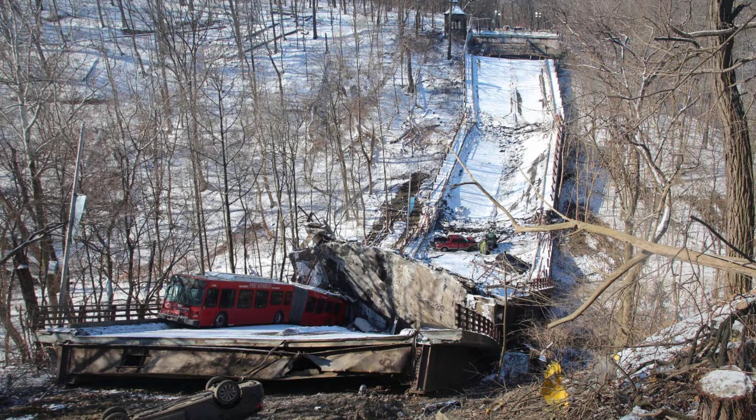January 28th, 2022. You were on your morning commute in Pittsburgh. The Fern Hollow Bridge gave out. 6 vehicles fell 100 feet into Frick Park. No one died. 9 people were injured.

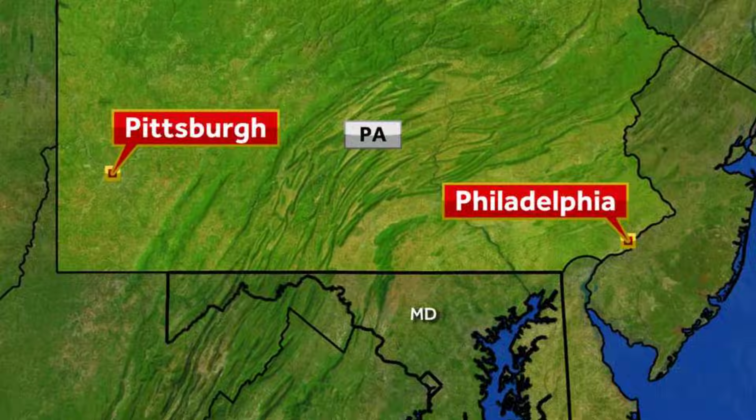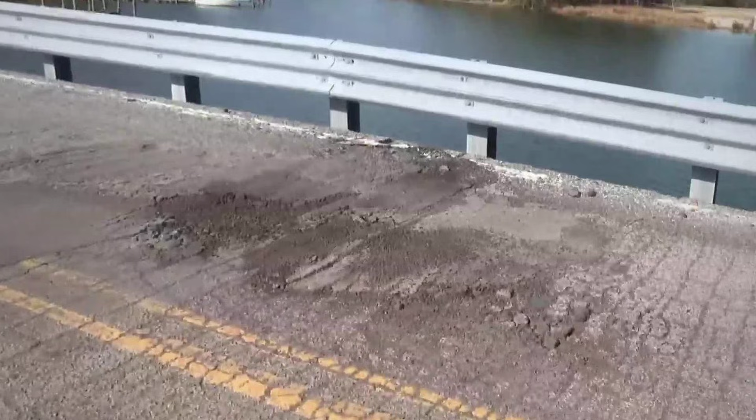It made the news everywhere. But you know what hits close to home? Over 2,800 bridges in Pennsylvania are in poor condition. That's more than any other state in America. 10 million trips cross those bridges each day. Why does this keep happening in our state?

The answer isn't just old concrete, it's something deeper. Every driver in Pennsylvania has already noticed it. Maybe you never put it together until now.

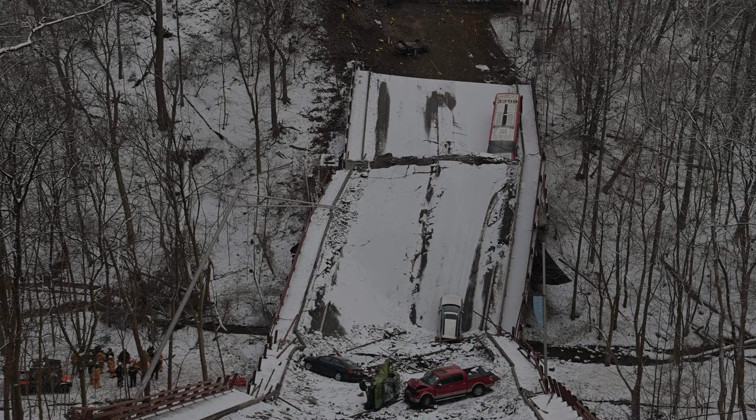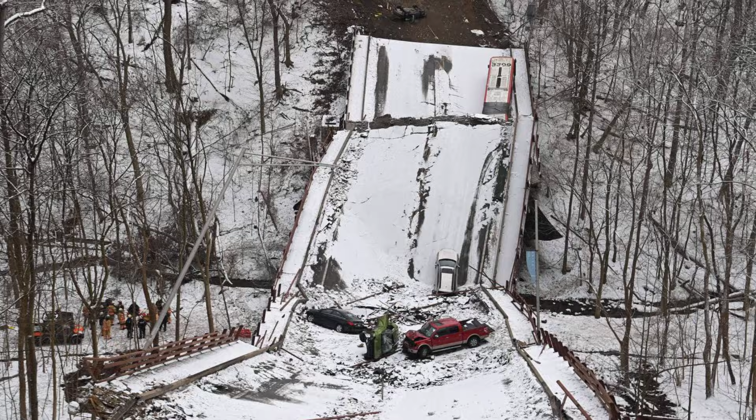Fern Hollow Bridge collapsed at 6:37 on January 28th, 2022. Commuters heading east on Forbes Avenue felt the road fall out from under them. A 447-foot bridge dropped 100 feet into Frick Park Ravine. 6 vehicles, including a city bus, crashed down with the bridge. 9 people were hurt in the chaos. Miraculously, no one died. The bridge was about 50 years old.

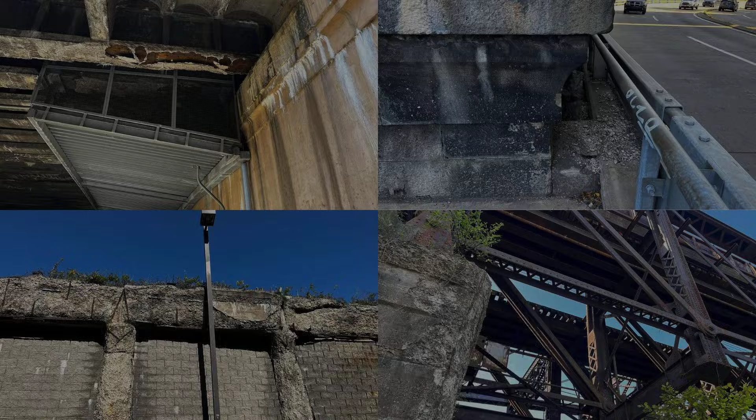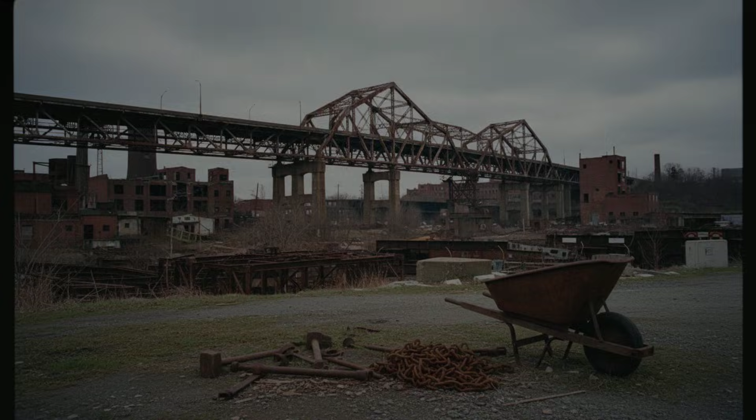It had carried traffic over the ravine since the early 1970s. Inspectors marked it as poor condition for over a decade. That rating meant the bridge needed repairs, not collapse. Problems kept piling up at Fern Hollow. Reports from 2011 flagged corrosion. Each year, inspectors wrote the same warnings.

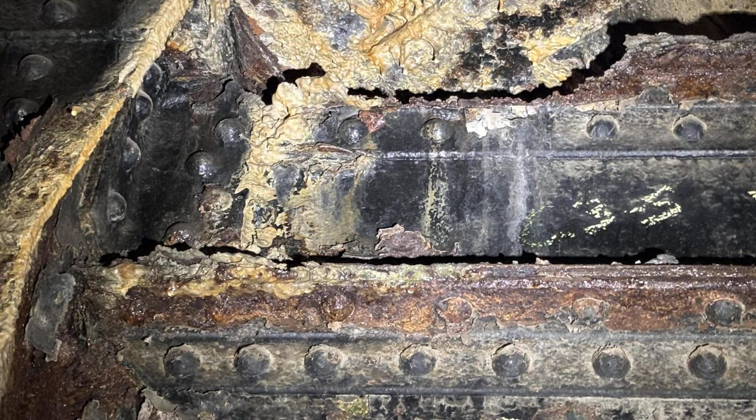Nothing changed. The National Transportation Safety Board spent 2 years reviewing records, photos, and inspection logs. They found water pooling around the steel legs. Water ate away at the metal. Clogged drains let water sit on the legs. Leaves and debris blocked the drains. Rust hollowed out the steel over time. The steel buckled under the morning rush weight.

President Biden planned to visit Pittsburgh that morning to discuss roads and bridges. Instead, the city woke to a broken bridge and many questions.

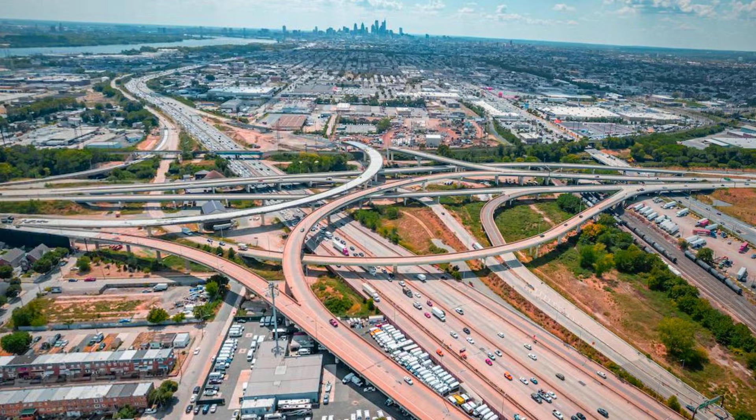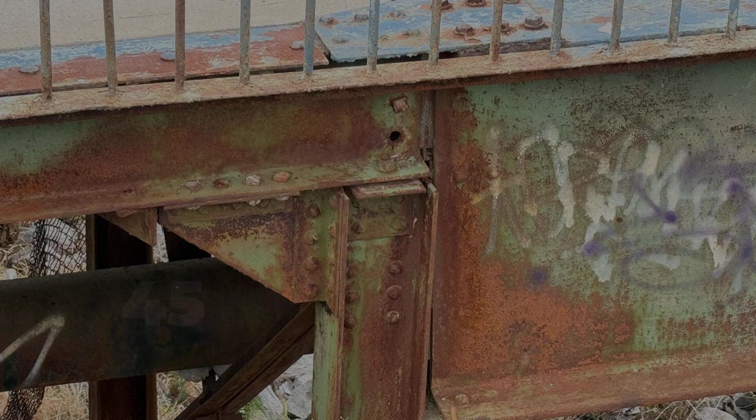Pennsylvania has more bridges than almost any other state. There are 23,314 bridges. That is the 9th largest count in the country. 2,813 of them are in poor condition. That is 12% of all bridges. Only Iowa has more bridges in poor condition.

Every day, more than 10 million vehicles cross these bridges. For most drivers, it is just part of the routine. But the trips add up to millions each day. Each trip goes over a bridge that needs repair.

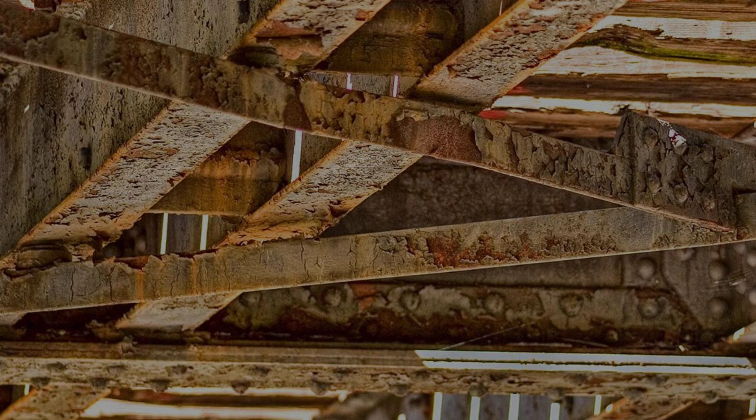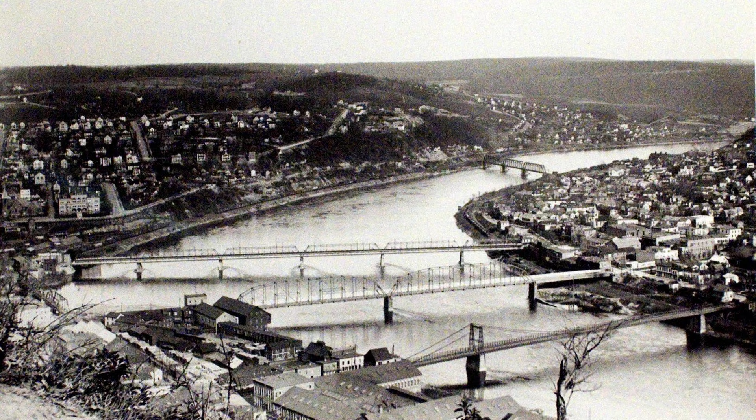The average age of a bridge in poor condition is 84 years. That is almost twice the national average age. All Pennsylvania bridges average 55 years old. Most were designed to last about 50 years. So many are past their intended lifespan.

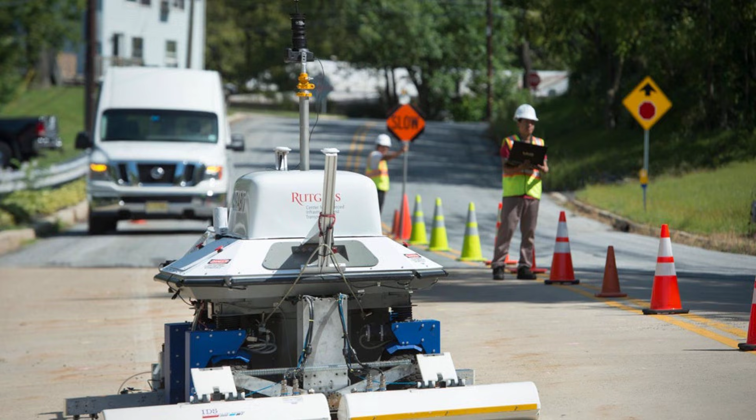A poor rating does not mean a bridge will fall. It means something needs repair. It could be the deck, the supports, or both. PennDOT inspects every bridge on a regular schedule. If an inspection finds a bridge unsafe, it is closed. Drivers never have to guess about safety.

A PennDOT spokesperson says we have many old bridges. We keep a close eye on each one. If a bridge is open, it is safe to drive on. The numbers are big, but the process is cautious.

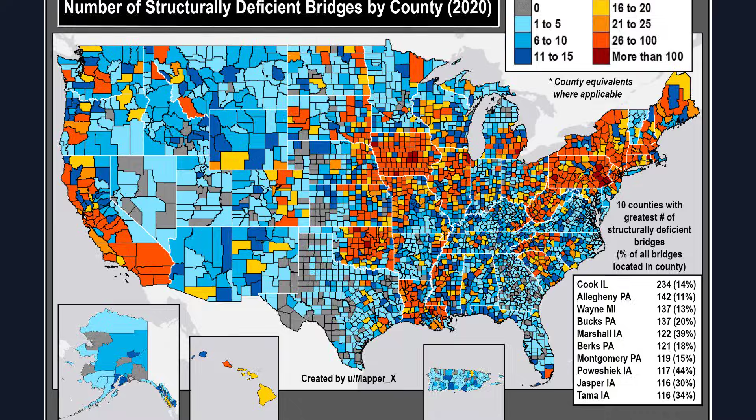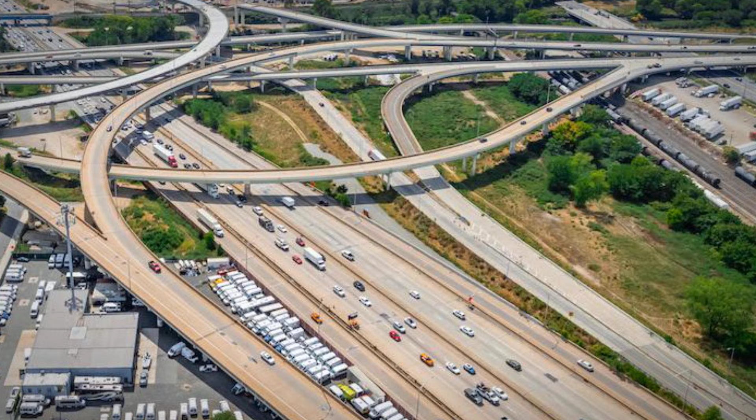The size of the problem shows this is a statewide challenge. Pennsylvania's hills and valleys give drivers few choices. 5 big rivers cut deep across the state. The Susquehanna, Delaware, Allegheny, Monongahela, and Ohio flow through it. Hundreds of creeks carve ravines, split towns, and force roads over water. That is why Pennsylvania has so many bridges.

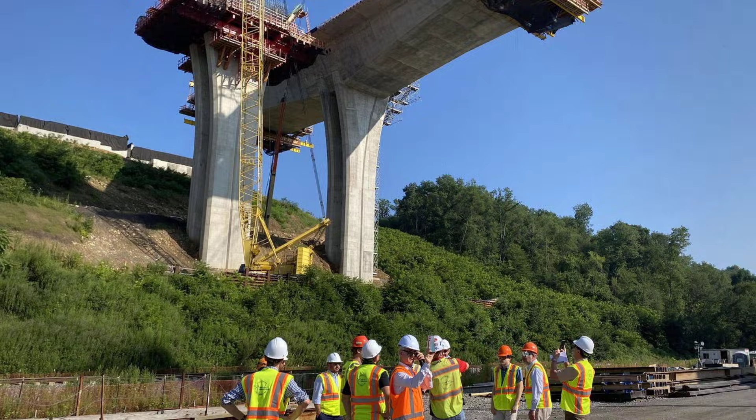In Pittsburgh, you find 446 bridges inside city limits. That is more than the city of Venice. Allegheny County alone has nearly 2,000 bridges. The Public Works Director says you cross a bridge every few blocks.

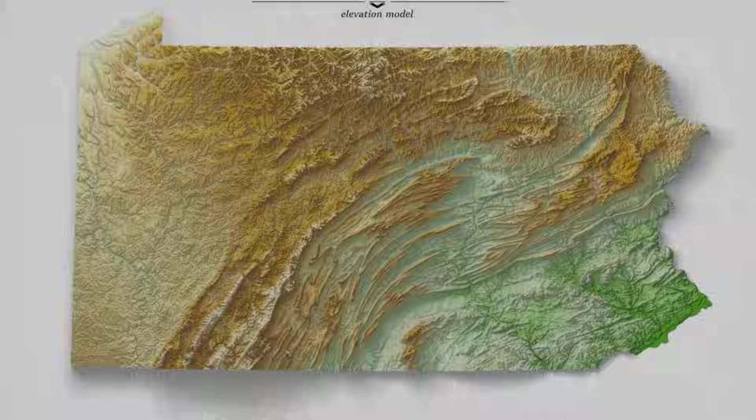In the 19th century, Pennsylvania built over 1,500 covered bridges. Today, 227 of those still stand, the most in the nation. Each bridge adds another structure that needs upkeep, and each also gives weather another spot to work on. Geography shaped the land and also shaped the problem.

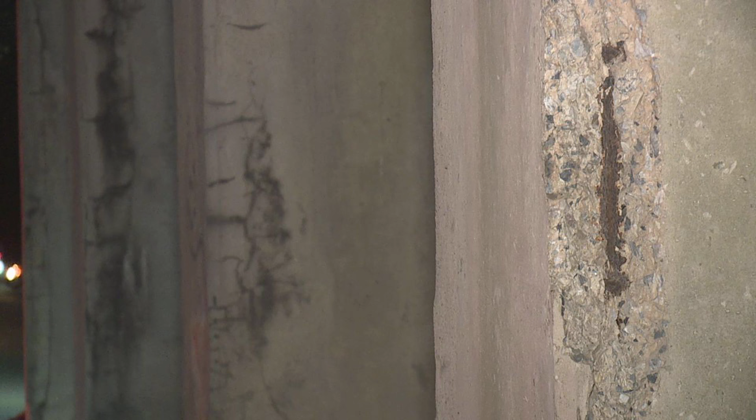Every winter, salt trucks roll out before sunrise. The salt they spread keeps roads safe, but it comes with a cost. Salt doesn't just melt ice, it seeps into cracks of concrete bridges, it settles on steel beams. The Federal Highway Administration says salt is the biggest cause of bridge wear.

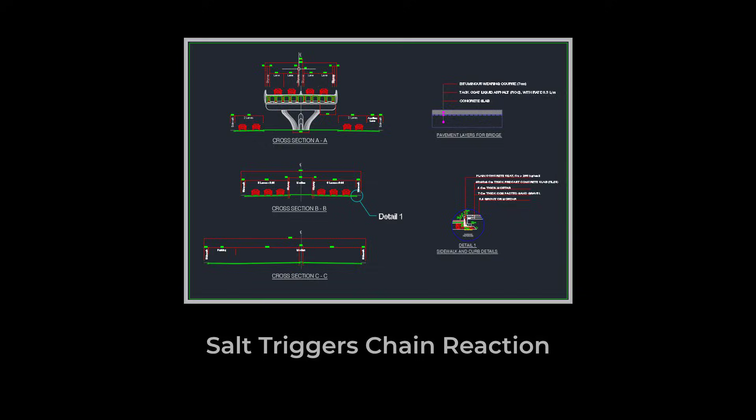Here's why winter damage adds up. Once salt gets in, it starts a chain reaction. Steel inside concrete begins to rust. Rust expands and breaks concrete from within. Water gets in, freezes, and expands.

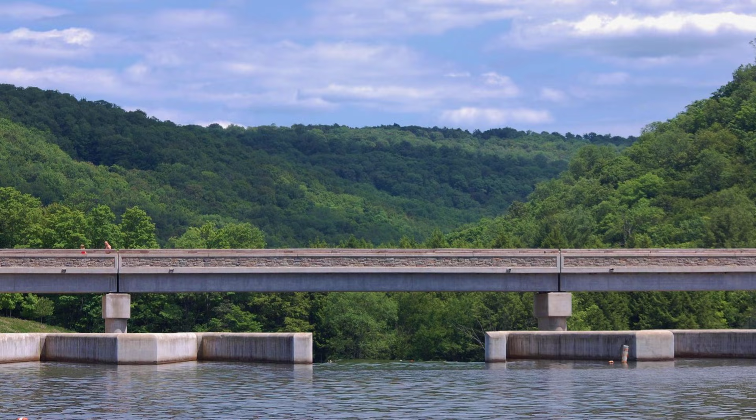Pennsylvania winters bring dozens of freeze-thaw cycles each year. Water seeps into a crack, freezes overnight, and widens the crack. The next day, it thaws and repeats. Over time, this cycle wears a bridge built for 50 years down to 40. The damage isn't always visible from outside. Inside, steel and concrete change each season.

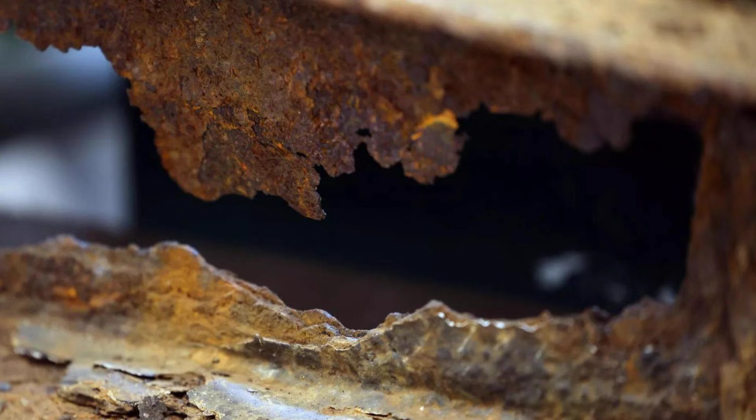Inspection records on Fern Hollow go back to 2005. Year after year, inspectors wrote the same problems. Rust ate the steel legs, holes widened, drains clogged with debris. In 2009, a plan called for rust-proof coatings and new bracing. Only a few cables were added. The real fixes never happened.

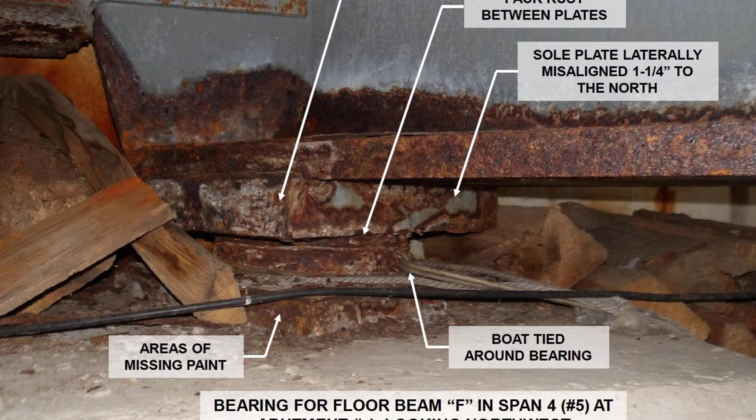By 2011, the bridge was labeled poor. No repairs came for the legs. Damage kept growing. In 2014, the city lowered the weight limit. Corroded steel stayed untouched. By 2021, a hole in a leg grew to a foot across.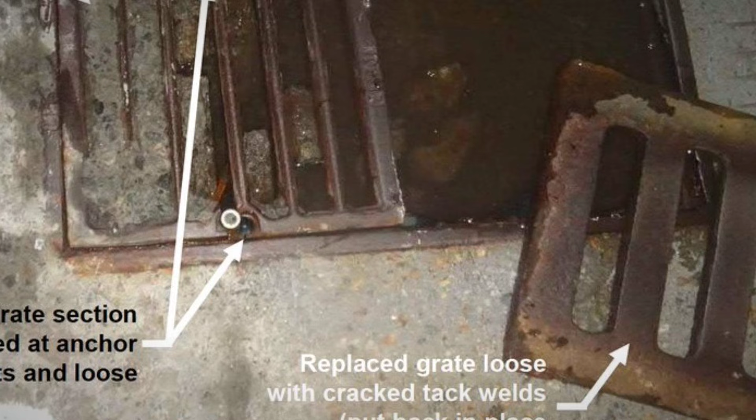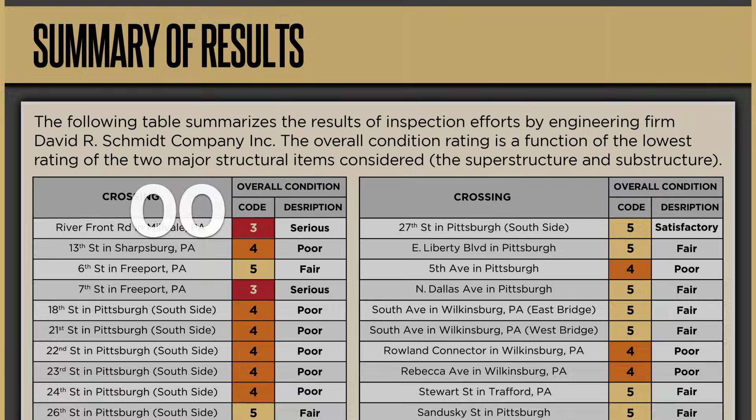The city inspector tried to sound the alarm. The number one problem was clogged scuppers and downspouts. I tried to preach that the whole time. No one set up a plan to clean the drains. No one patched the steel.

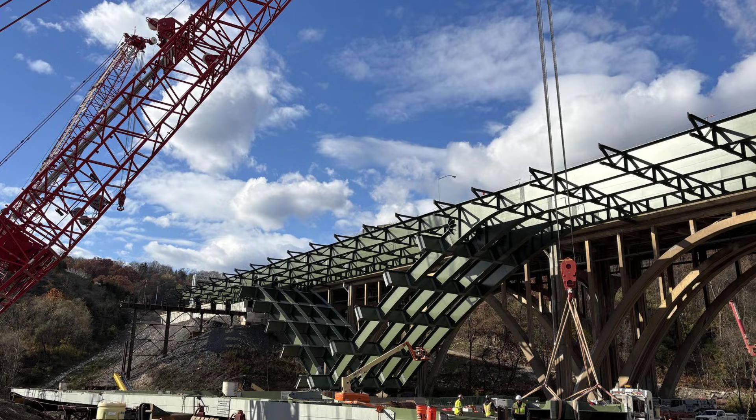For 16 years, warnings stacked up and nothing changed. The damage was not hidden. It was written down, photographed, and left to get worse. PennDOT's chief engineer points to the numbers. Since 2008, crews have repaired or replaced thousands of bridges across the state.

Act 89 passed in 2013. It brought in $2.3 billion each year for roads and bridges. That steady funding changed the pace. In just over a decade, the number of poor bridges dropped by 42%. 2023 stands out — Pennsylvania repaired more bridges that year than any other state. 90 fewer bridges are rated poor now than a year before.

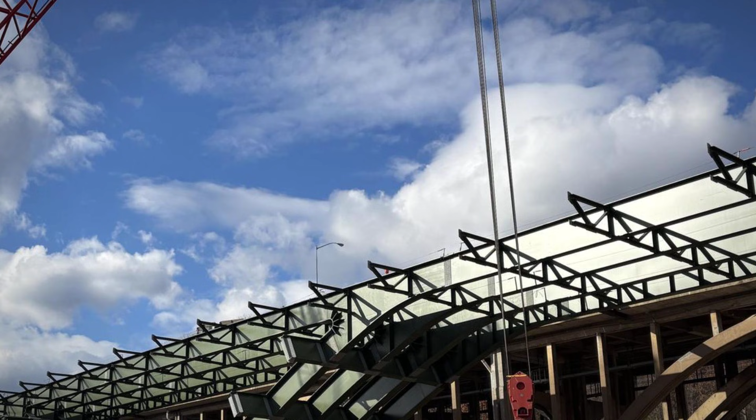Federal dollars are helping too. The latest bridge funding law is sending $1.4 billion to Pennsylvania. The money will fund bridge work. Each project means fewer drivers crossing a bridge in poor condition. The progress is steady, and the momentum is real.

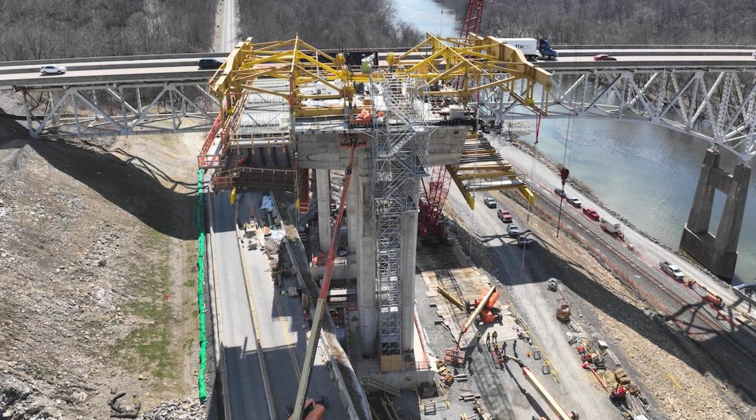Even with new funding, the gap remains hard to ignore. PennDOT says Pennsylvania needs $18 billion to fix every bridge that needs work. State and federal money does not cover the whole cost. Construction costs keep rising, and repairs take years to plan and finish.

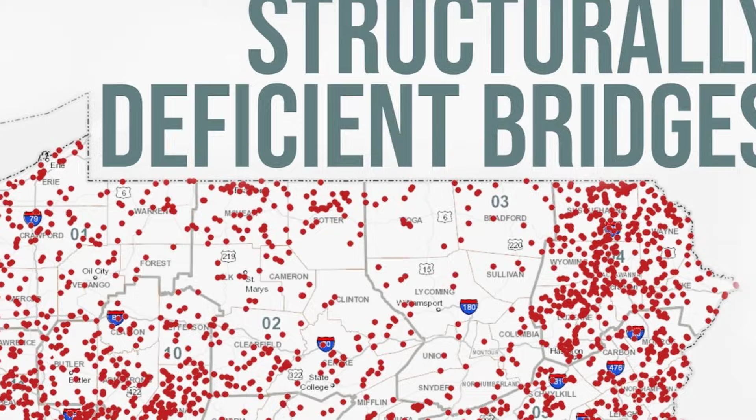The chief engineer at PennDOT says we are making progress. He adds, the need is still huge. Every dollar counts, but it is not enough to clear the backlog. So the work continues, one bridge at a time.

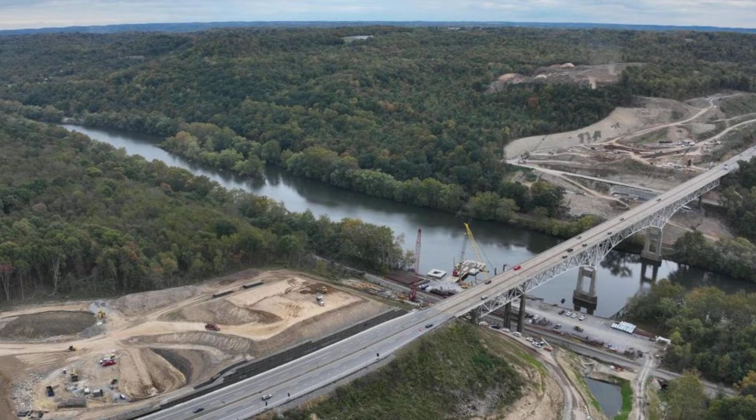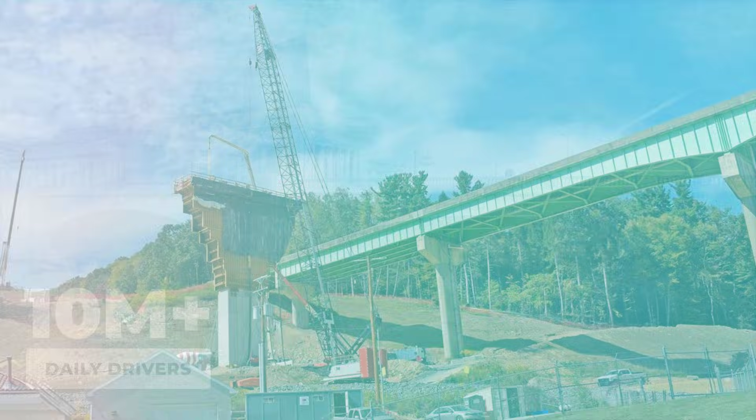The state moves in the right direction. The challenge is bigger than any single year's budget. Every day, over 10 million drivers cross bridges that outlasted their design by decades. Real progress is happening, but the need never goes away. Roads and bridges shape daily life here. Every repair or delay writes the story of how Pennsylvania connects its people.